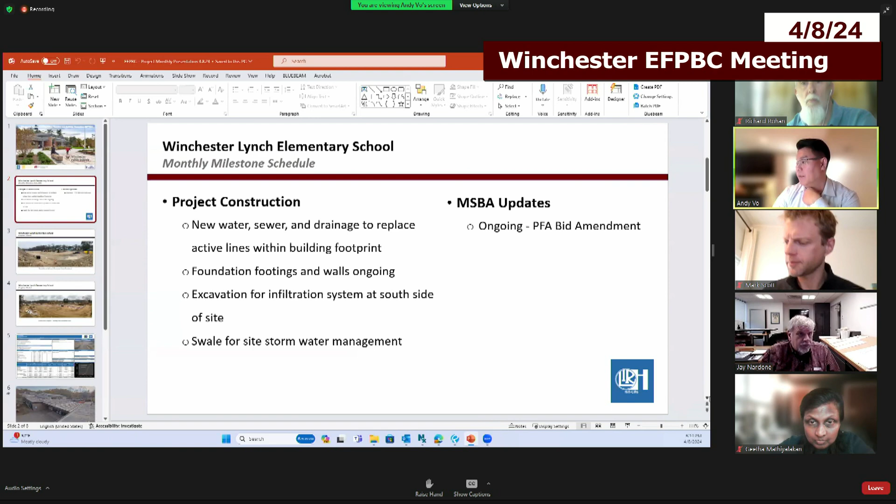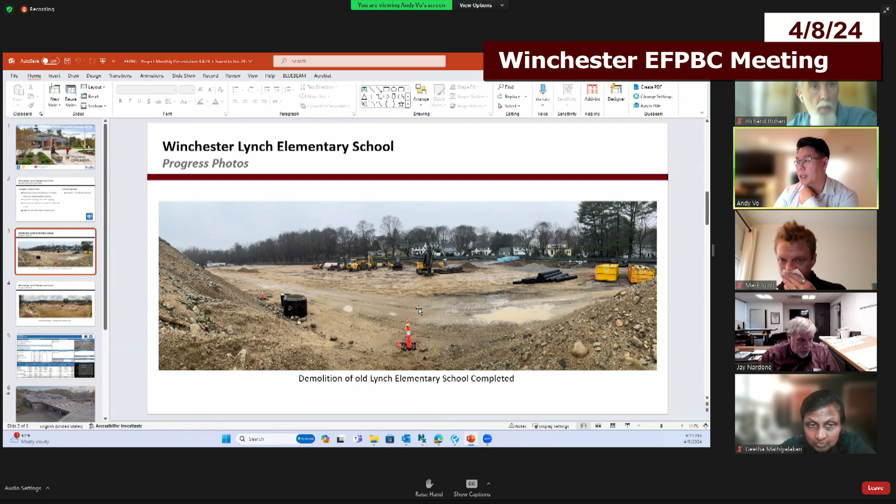So here's a picture of the demolition of the existing Lynch School that is completely complete. As you were on site last week with the groundbreaking, you saw that the building is completely down. Here's another picture of the foundation work where the gym is. This area we call area A again.

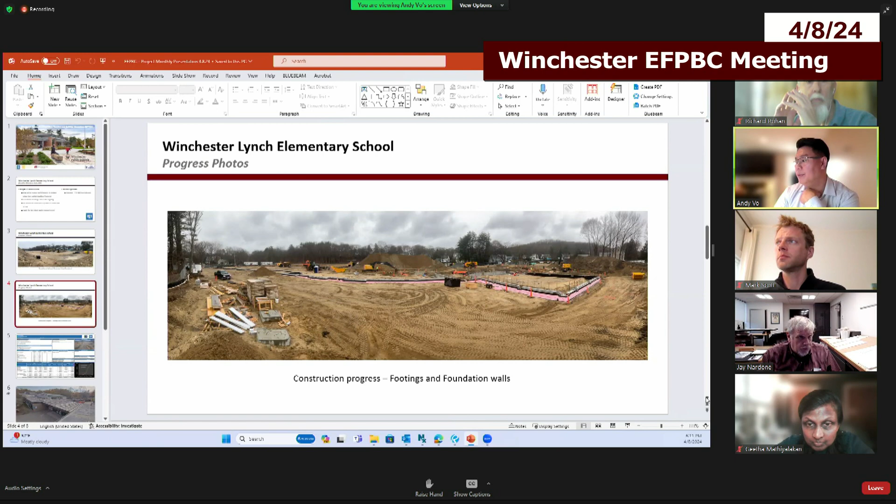A couple of tasks are going to be happening in April: we'll continue working on the new water line, which is happening right now, sewer line, drainage. We're going to be removing the existing utility lines, like water and any drainage, once we're done with the new water line. We'll continue working on the infiltration system, and getting delivery of steel starting right now, we have it for the 15th of April. And then also working on the mock-up for the exterior.

As I mentioned, steel is still on target for the end of June or first week of July completion, that's including the metal decking. Roofing, we're targeting to get that done by September 1st. So everything on the schedule is still the same. Windows, as I mentioned before at the last meeting, we're still targeting for December, that's still right on schedule. And the underground plumbing, fire protection, those will be done in the spring of 2025.

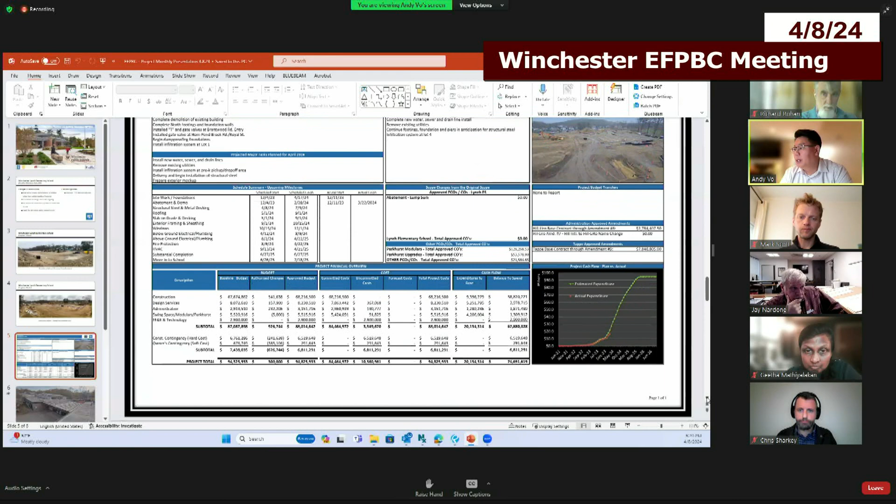I want to share a little bit on the time lapse of the demolition and what's going on site. So just be a little patient here - the first few seconds are going to be a little lagging because we moved the camera from the existing school to the other side of the site.

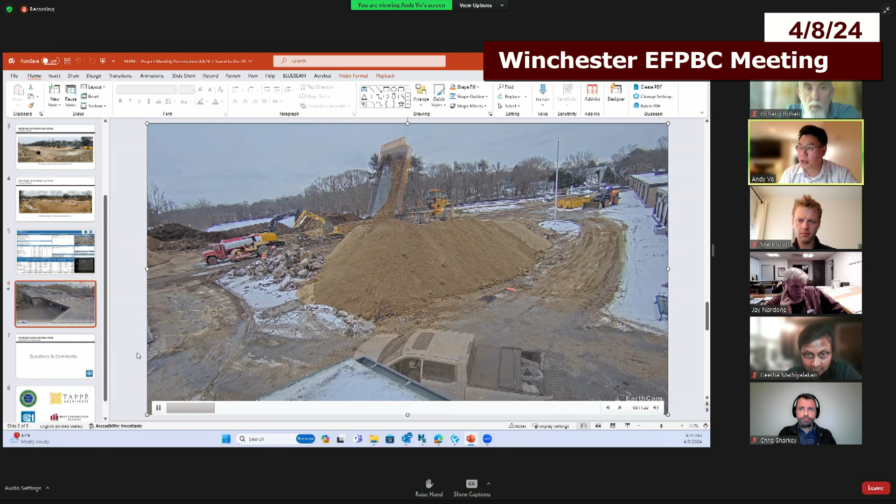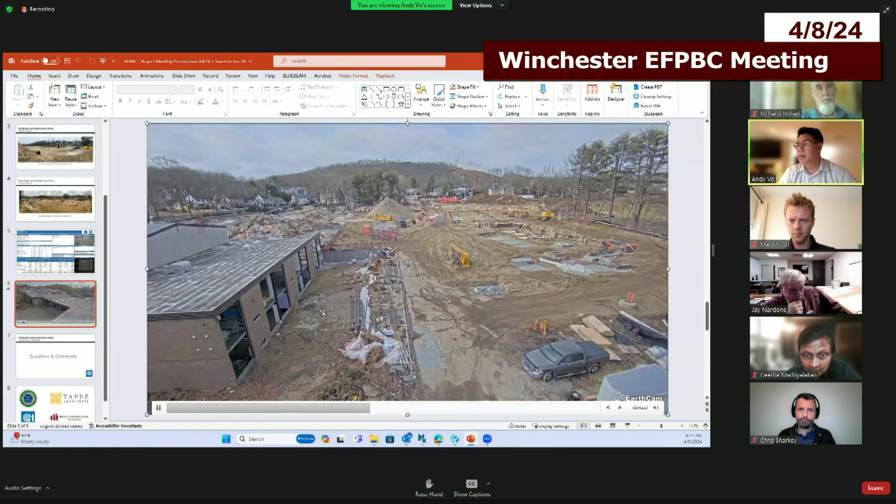This is where they first started the excavation work. We moved the camera down to the west side of the building - you can see a little corner of the existing Lynch school. We started the foundation work on this side, C building, as you can see here. We started the abatement of the windows, and now you can see the whole entire work on site.

So glad that we were able to use the swing space. You see how tight they're working, like the foundation on the north side and removing the existing at the same time. Yeah, yeah, I agree.

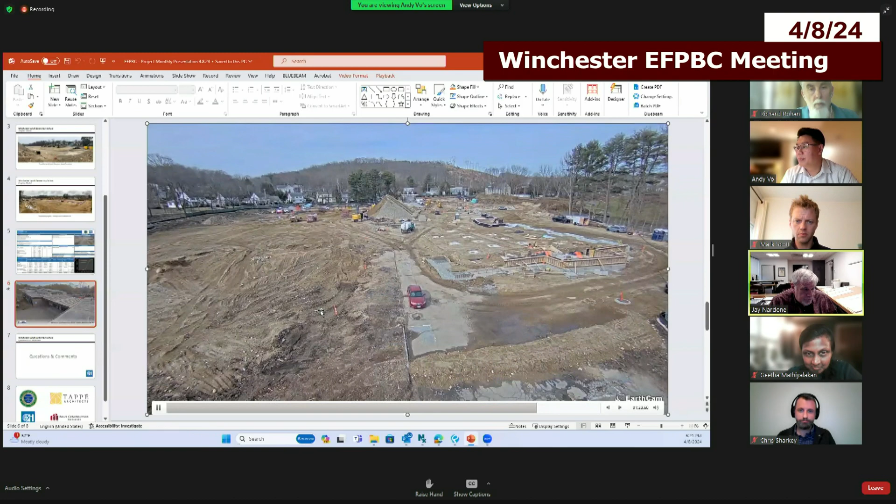Right now, this area here is where we want to concentrate on the water line, but once next week comes, we should be finishing the water line in this area and then removing the existing water line, so that when steel comes next week, they'll be flying pretty quickly.

Our target is to finish this area, area A down here where the gym is, in April, and then work toward here in May, and by June we'll be finishing area C. By July 7, as I mentioned earlier, we'll be done with the decking as well. That's where we are right now today.

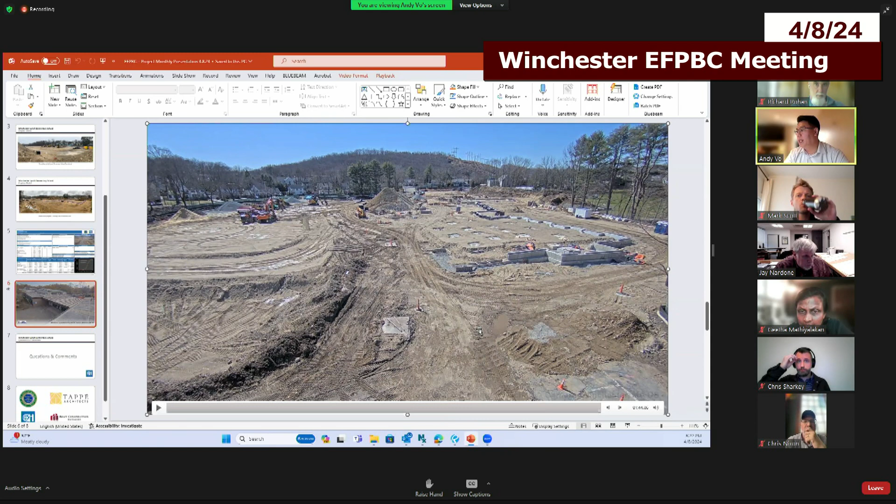So I will jump quickly onto my monthly report here - this is the March monthly report. Can you see it, you guys? Yes. Okay, alright, great. So if anybody has any question, please send it to Jay and he'll get it to us.

So here, the usual stuff, the regular team. On the update, let me just zoom in here.

So what's going on right now? Again, we try to get most of the site work and utility work done. As I mentioned earlier, we finished the infiltration work at lot 1, and now we're working toward lot 4 for the drainage work, targeting to finish the water main and sewer line this month so that we can get steel next week. Continue working on the footing and foundation.

As I mentioned, right now at the same time we're working on the exterior mock-up as well. And as I mentioned many times, the steel will be delivered April 15.

So last Friday, as they were working, they hit the existing water main, but it was repaired that same day on Friday, even though you guys were there for the groundbreaking. The site contractor hit the water line, and they were able to repair it with the help of DPW. They were out there fixing it, but there was no impact to the groundbreaking. It's totally repaired already, and everything was up by the end of the day on Friday last week. That's one issue.

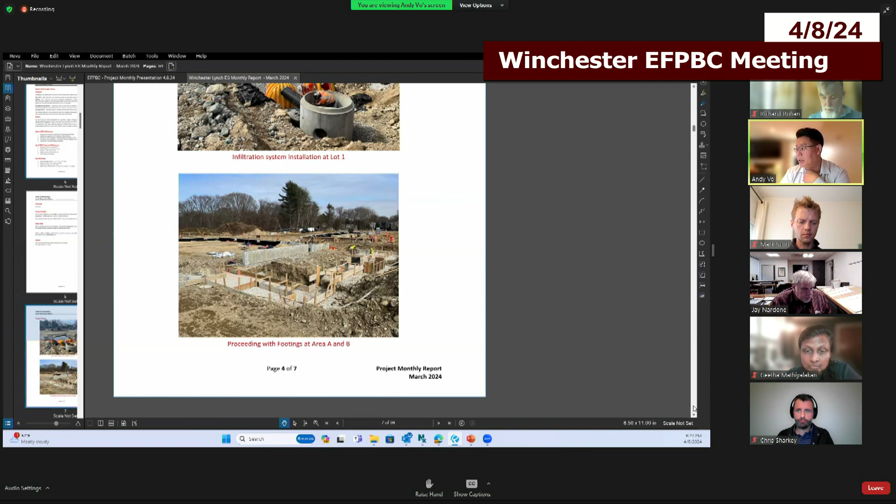Footing - we'll continue working on the footing at area A and area B. As I mentioned, area A is where the gym is, this area here. Right now they're still working on the footing at area A and B. They poured the foundation wall here at area B, and the same thing for the foundation work at area A.

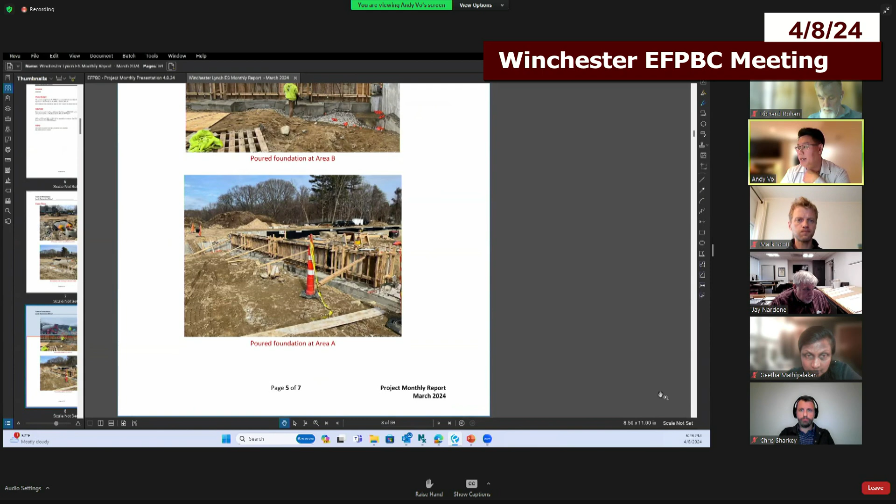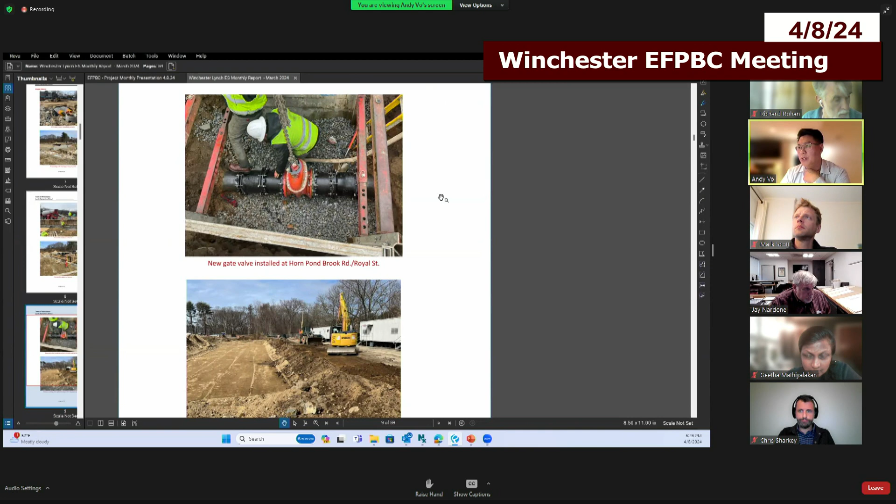This is the water gate valve that was installed on the Horn Pond Brook side. This was installed about, I think, last week. Here, they removed the curb and asphalt to do the storm water work as well.

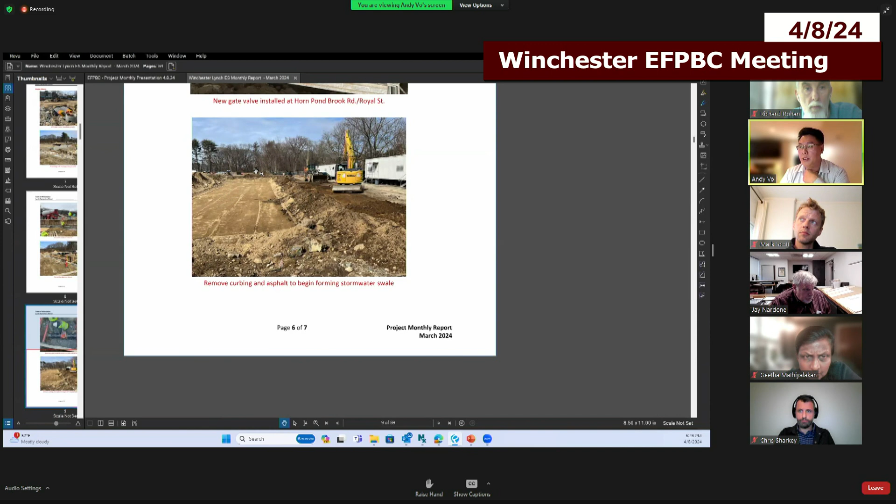This is the existing Lynch demolition, as you saw on the time lapse earlier - it's completely gone. Continuing progressing at the north side of the site, with the footing and foundation. Things are going well; we'll be ready for next Monday's steel delivery.

There's not much to report on the financial side. As I mentioned, we'll be catching up on the cash flow next month for the April requisition with the steel delivery and the concrete - that will get us right on the cash flow.

As I mentioned, we have an updated schedule. I'm not going to go into every detail - I have it on my dashboard with the key milestone dates. There's not a lot of stuff on the critical path right now; fireproofing is on it, but there's a lot of float there. So I do want to point out that right now, Bright Builder will be finishing at the end of May 2025, based on their schedule.

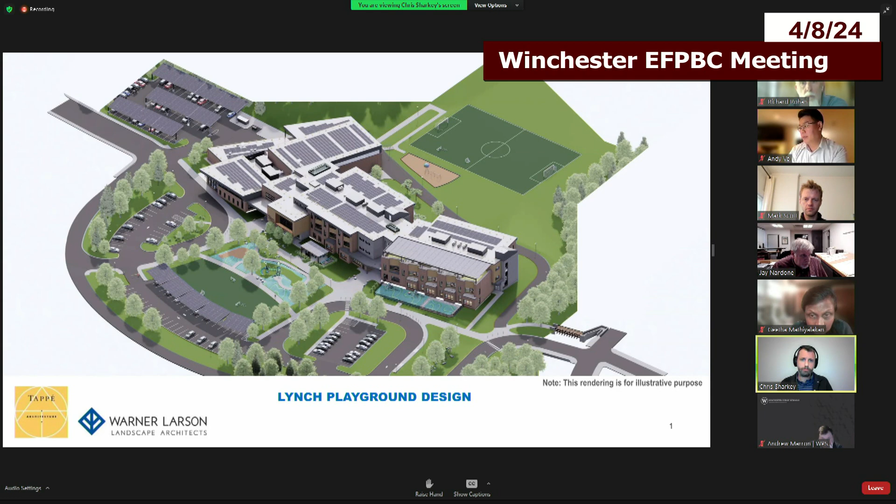So this was the presentation that Andrew was talking about, that we, along with Warner Larson, had created a few months ago to talk about the playgrounds. There are basically four different play areas, and we'll go clockwise, starting at the pre-K. So there's pre-K play, and then in the middle there's the K through 5 play with the field below. Then there's a hard surface play next to the gym, with a little covered canopy over that, which will be nice. And then in the back next to the soccer fields, there's what we're calling the bonus play.

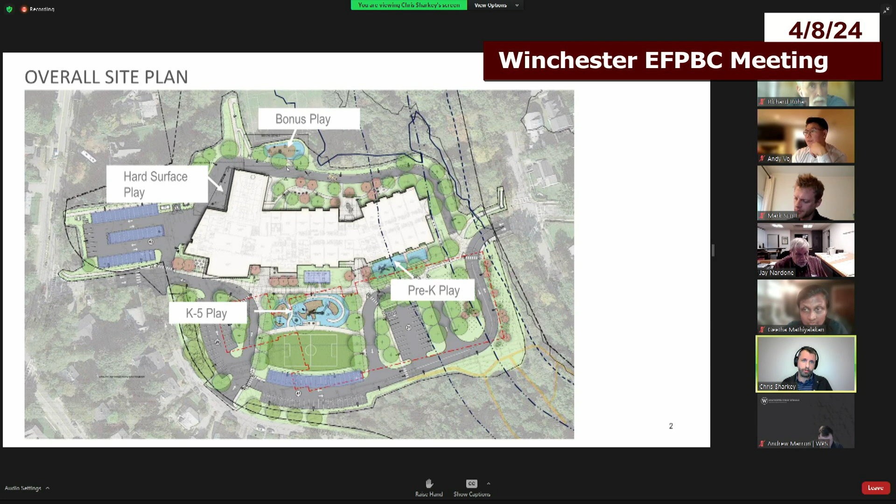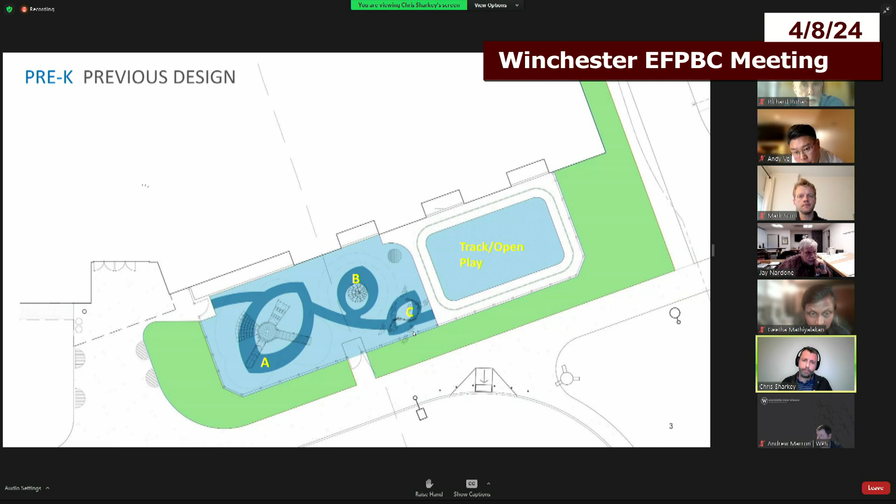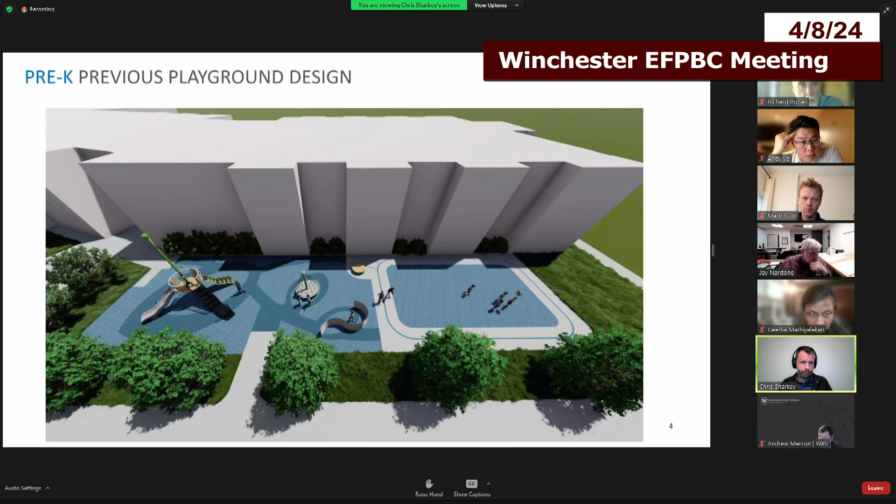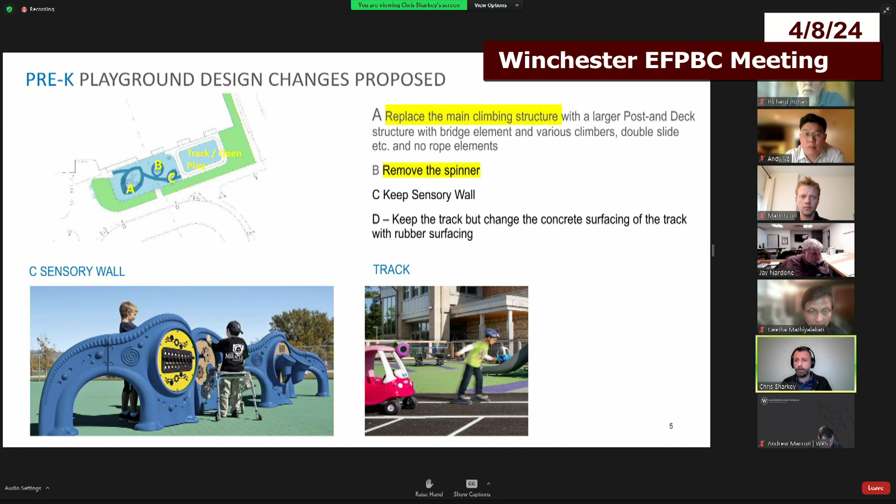So through the feedback that we've gotten, what we did was we replaced the main climbing structure, removed the spinner, and kept the sensory wall. That bottom left image is an example of that sensory wall. And the track, we had it as a concrete track so kids could ride bicycles and things like that, but through the feedback, that's better off as a safety surface, so we're switching that.

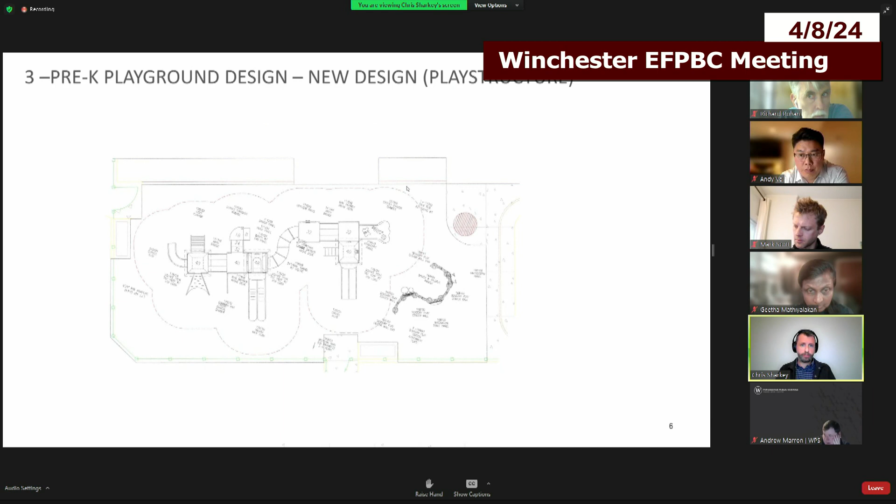So this is a plan of the new climbing structure in that pre-K area. You can see that the play structure has grown in size, and we've kept that sensory wall to the right, with that more open space cut off. This is a visual that generally, I believe, is what we're going to be having in that space. Color we can change and modify with the school, but this is generally what we're doing for the play structure.

So it adds a few more slides and some different spots to get on. There's a couple different transfer stations and stairs and different ways to get up, and again the sensory wall to the left. One thing we got feedback on, and one thing they really liked about their existing play structure, was this tunnel tube, so we wanted to add that back in because of all the great things we heard about it. Yeah, so that's kind of the updates to the pre-K.

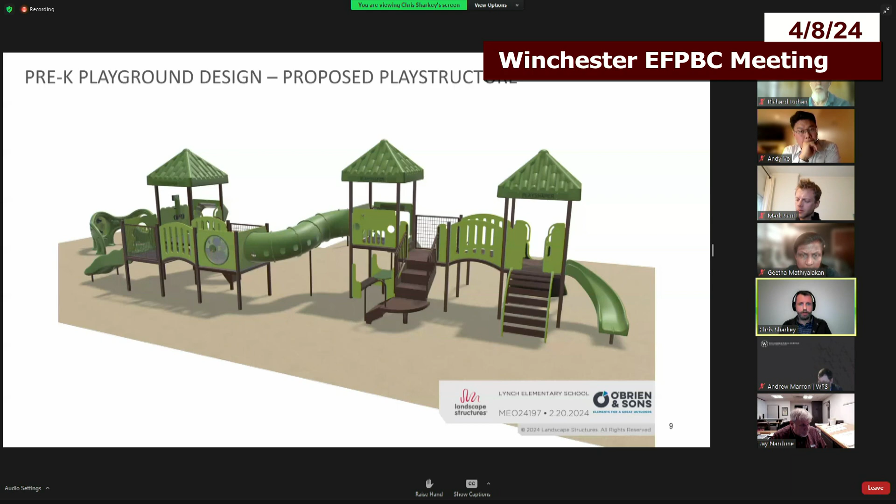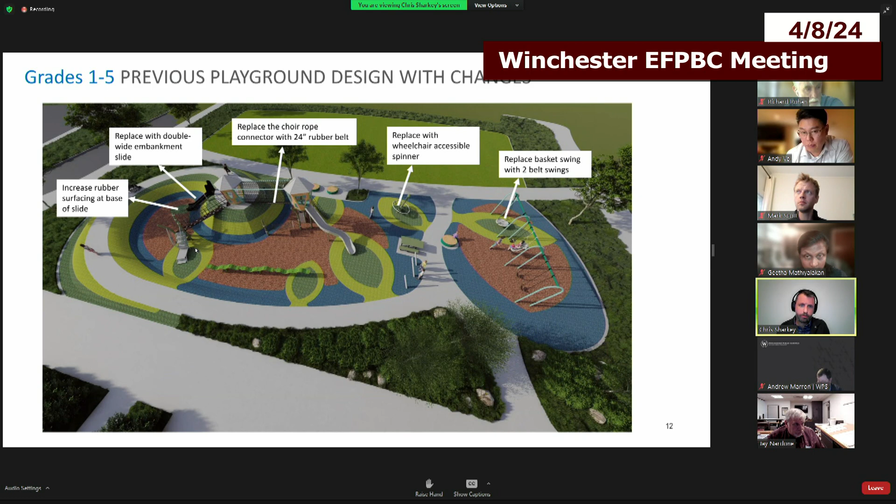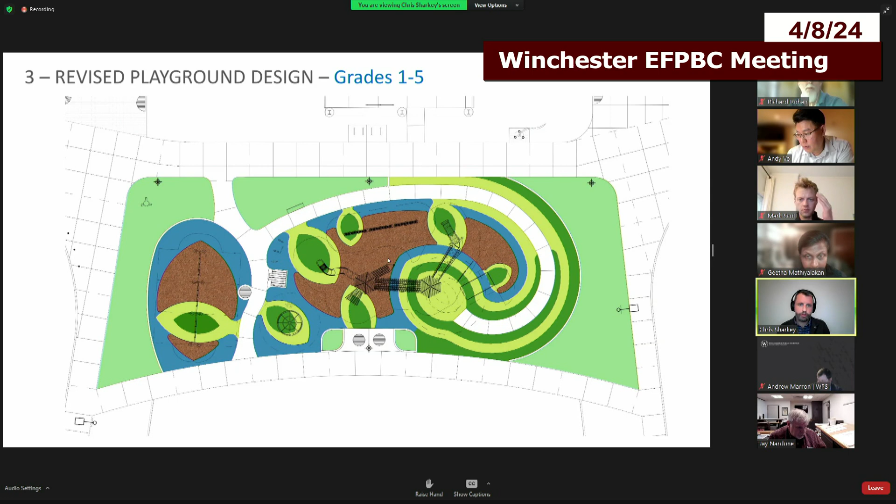Yeah, so this is the revised plan. It's similar, but we did make some updates with the accessible spinner towards this side, the double embankment slide here, and we just made sure that it was a little bit more accessible all the way around.

And then this is examples of that accessible spinner. So we went through from kind of a basket, which is up off the ground a little bit more, and so it's harder to use versus this one. So I think this will be a really nice feature.

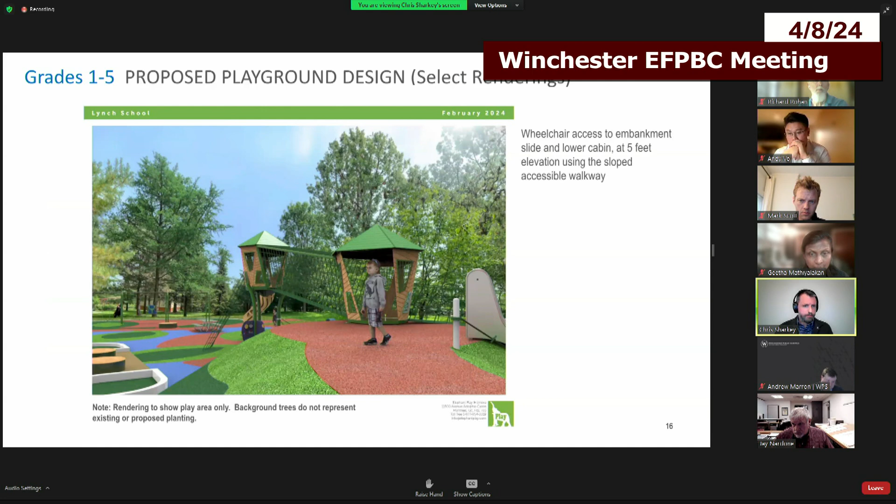And then here are a couple more images of the revised structure. So you can see in the background to the left is the double embankment slide. Yeah, that's a good picture of it.

One thing we had heard was that some kids really like to go together, right? And having one doesn't really do that. So widening it up will allow a little bit more fun and accessibility. Just more images of that play structure.

And then we went from the basket swing to more of your typical swings.

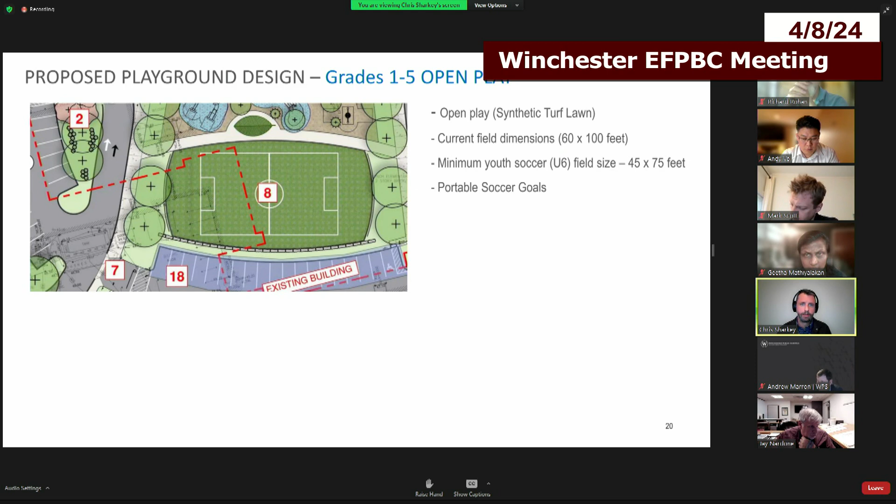And then we did this, the open play, the turf field. So it's not huge, but it'll definitely be good for gym if they need to, or just recess and having various games.

And then this is that bonus play on the north side next to the fields. So this one is a little bit more organic in terms of the play equipment, and we had heard some feedback on wanting something a little different.

So you can see that there's these logs that you can just jump and play around, and then what they're calling a climbing net or tent - it's just a net. And then a couple more swings with a basket.

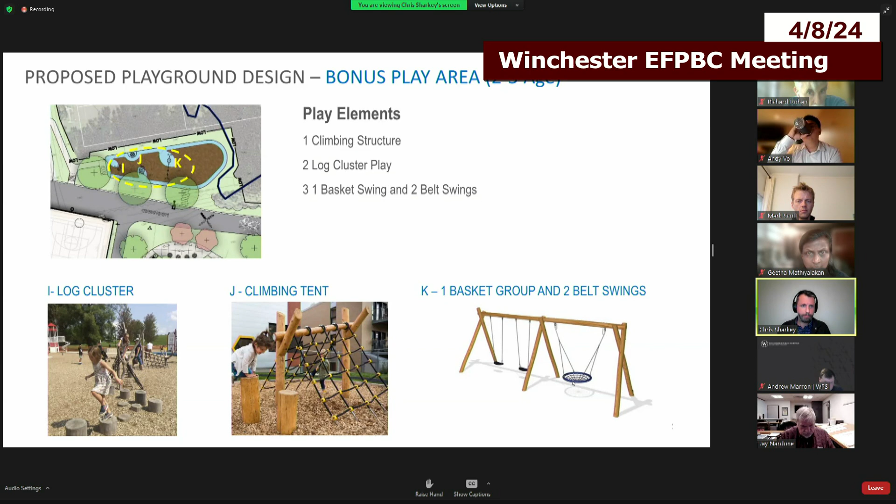And that's it. That's kind of the highlights of where we are with the playground.

Okay, any questions for Chris? This is Lisa. Lisa? It's better. Still, I mean, it's better.

However, there are things there that I think in the future when we go to do another school, we need to have the DAC involved earlier, because even as I'm looking at these good designs and modifications, some of the things that are selected are not the most accessible or universally accessible. So that's what I just want to say. I think we need to get the DAC involved earlier in the process.

You know, we've got the state-of-the-art school. I just wish the playground was a little bit easier, but I understand for the financial constraints and everything. But there are things that I'm looking at that are not really too accessible. But there's a lot that's good here, much more improvement. But that's just what I want to say to it.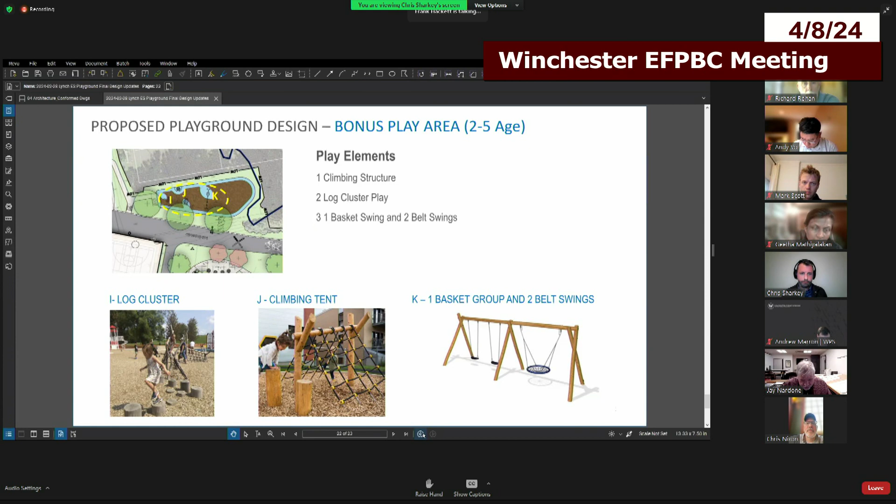The outside back playground area, and what you just referred to specifically, like the wooden elements, that really has not been designed fully. Those are concepts that we are still really kicking around. But I would be a little disappointed to think that people didn't feel like they were heard, and that the input they gave is truly reflected in the preschool and K-5 main structures, with the addition of the spinner in particular also. But because there was a lot of effort put into that, I do think the comments were heard.

And I think the design team did a great job really responding to those. There were quite a few changes made, and in fact, as you know, Lisa, really the preschool and K-5 main structures are completely different than what they were initially, and that only happened because of the feedback the team received from you and from others. So, but I certainly hear you on the last slide with the back playground. We've talked about that as a community playground. I think we have a lot more time on that, and more options. So I just wanted to add that, from my perspective, the preschool and K-5 playground have really benefited from the input.

No, and Frank, I do agree, there's been a lot of improvements, but I just, as we finally try to tweak it, as we say, to make sure we get another look at or go at it, just to make sure, because it's an important thing that's going to be around for many years. And I would just hope, so that's just my thing, Frank.

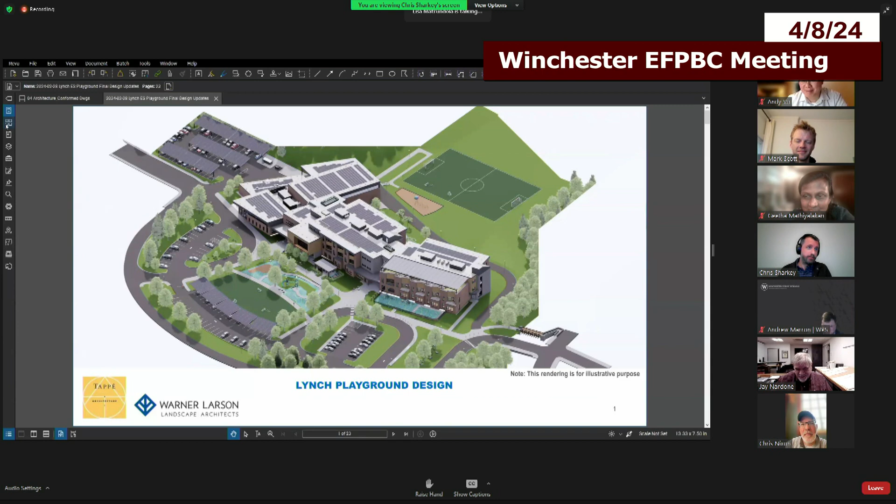But we'll take those stumps out right now. Chris, get the stumps out of it, will you? Right now. Get the better stumps out. Chris, just cut the slide out right now. You better believe it, watch this.

All right, let's move it forward then. Okay guys, done. The rest of the stuff looks pretty good. Yeah, that back area we will revisit and we will make that better.

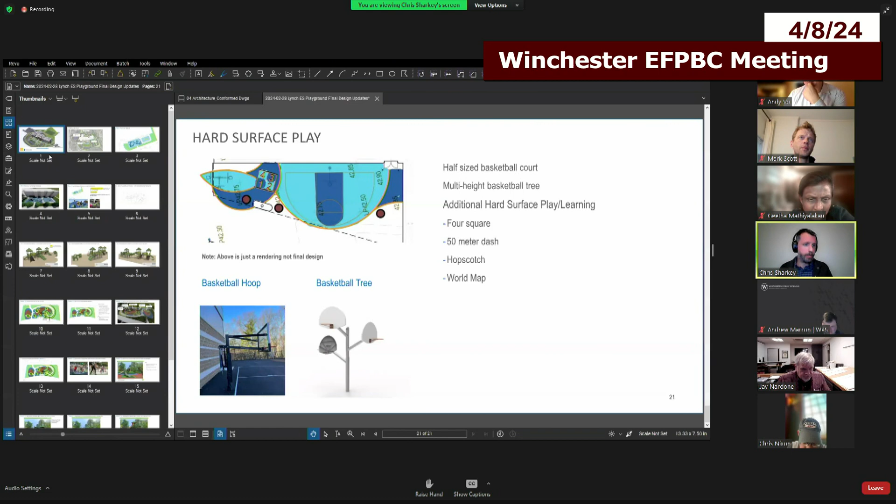I appreciate all the comments and input. Without you guys, it wouldn't be as good as it is. Frank, I know everybody's put a lot of work into it, and I want to thank you and everybody on the committee. This wouldn't be where it is without your feedback, Lisa, and the feedback of some of our WinPAC representatives. They were a tremendous amount of help in all this.

Lisa, the motion tonight is going to be limited to just the K-5 and pre-K playground and play structure changes that Chris presented. It won't even include that bonus area that they continue to look at. So moved, Mr. Nixon, if that was a motion. I think I have it under payments and authorizations. We'll save it all until then, but we'll get there soon.

Any other questions for Chris Sharkey or Tappe? I don't want to delay, but when you showed a slide at the very end, there was a blue line showing - Chris, I was just curious, where is the existing tree line and what does that blue line mean, the bonus playground area, or however you want to call it? Oh man, I deleted those.

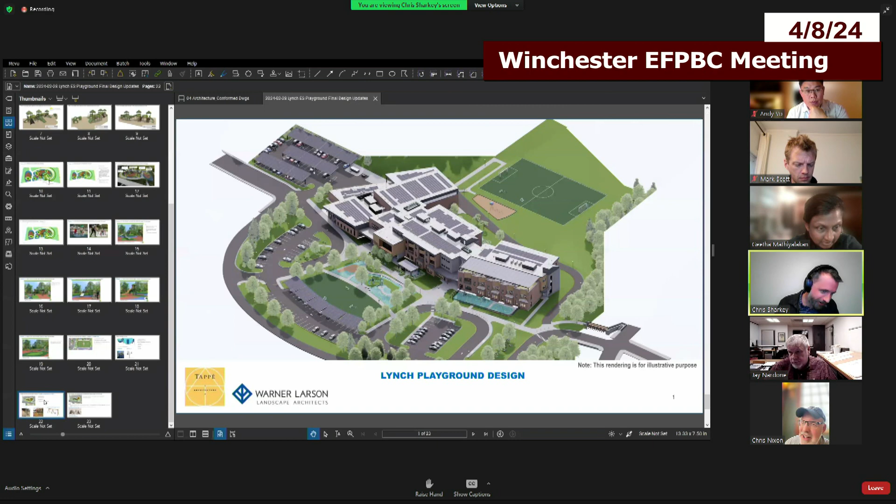That's a good answer, let's see if I can get that back. That conflict no longer exists. What is that blue line? Let me see if I can get that to work. And then what is that dark blue line? I believe that is the floodplain. So we wanted to stay out of the floodplain. Okay, and where's the existing trees? They're nowhere close to this, so that's being left out there. Yeah, so we're kind of right on the field, but yes, that blue line is the floodplain.

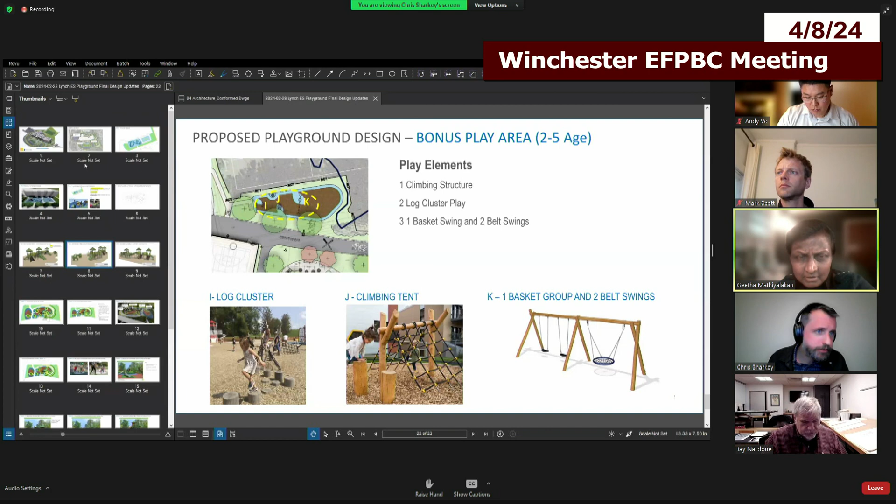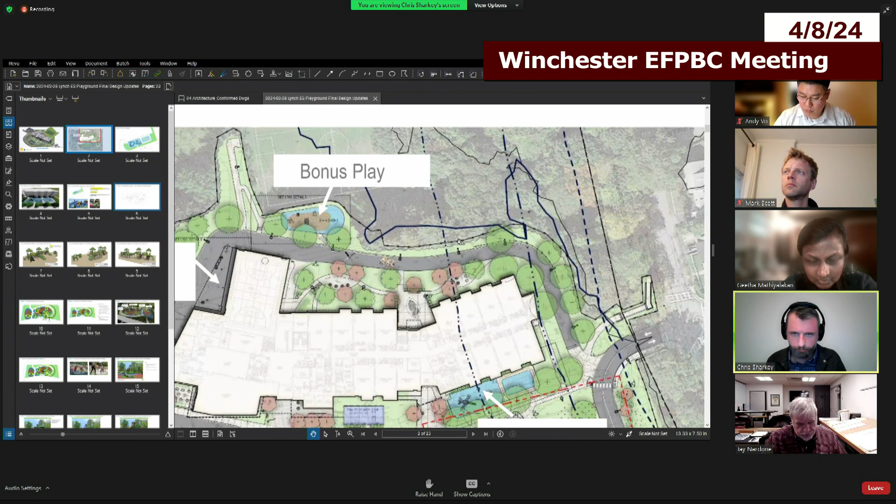So the trees that are being left out there are far from where they're going to play. That's the question I'm getting at - when you go out there, you can see an existing tree line between the school and the field. Where would that be? It's more off to the right. So this is kind of that bonus play area back here, and then this is the existing tree line, the trees that you would see. Okay, I wasn't sure how close it would be when the kids are playing. Yeah, and then from one of our last discussions, there were some pines in here that will have to be removed, but that's kind of in that area, if you remember. Okay, it's right along there.

Chris, I think we authorized in our meeting with David - I think he identified 4, right? There's some old eastern white pines back there to come down. So there's 4 right there, and then there's an oak that was damaged back that way, so those will come down. But yes, and then there's the rest of the woods back that way.

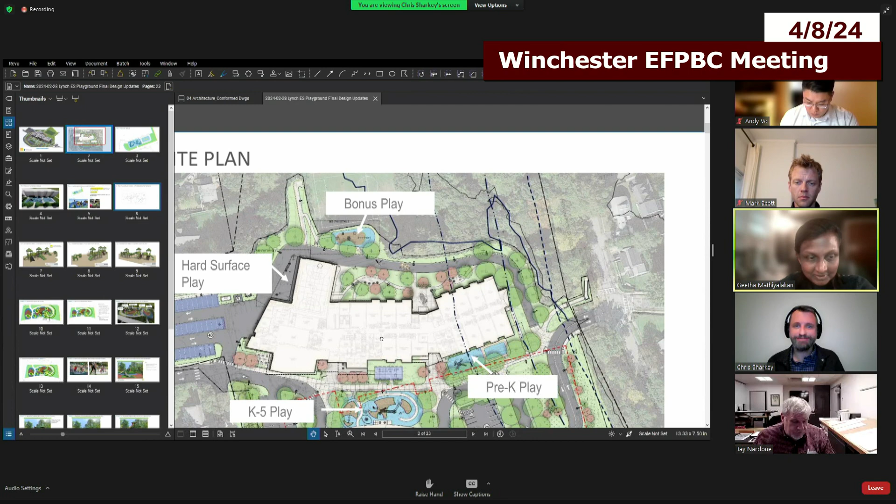Frank, I know you have another tough question. Yeah, I know it's a tough balance when you have high energy kids and other ones. I'm making good - I thought I had my hand up, all set, no thanks, just wanted to make sure. It's a tough job, but anyway, thank you.

Anything else for Chris? We'll move on.

All right, we're going to go on to the gymnasium update. Chris Nixon, you're going to step in for Meg on this? That was going to be you, you were going to talk about this one, I thought. You want me to? Oh, okay, I'm reading the wrong note across here.

So we did have 4 competitive architects bid the job. Chris, myself, and Meg did an evaluation sheet. We all read all the proposals, and Tappe won the bid, so they're out for a proposal. I think it came in today - I didn't get a chance to get caught up on my emails, but I think we got the actual proposal today with the costs, so we'll be reviewing that and sharing it with the committee. I was surprised to see that we got 4 bids. Probably 3 of them were real good bids, and one really shouldn't have bid on the project, but it was a lot to go through. They had a lot of references on gymnasiums and stuff, so it was very competitive. It's good.

Any questions on that? Even though Chris Blesson isn't with us tonight, Chris Sharkey, if you don't mind, pass this along to him. One of your competitors observed that what constitutes grade 2 maple and athletic facilities has changed a bit, backsliding over the past 10 years. We saw photographs of grade 2 from 10 years ago versus last year, and that consistency is gone, so it was a good alternative. If you guys weren't in it, that might have been the team we went with. But the message was you might want to reconsider grade 1 versus grade 2.